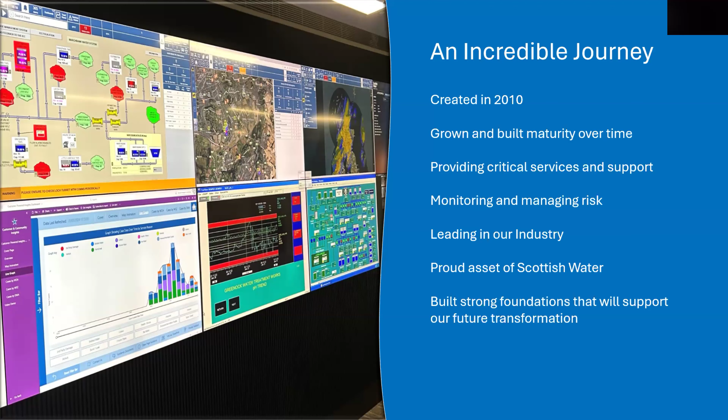As we built our maturity, the main focus for us has always been about reacting and responding. We've not really had the technology that's given us early information to make intelligent decisions. Part of our future transformation is very much to move from a place where we react and respond to becoming much more predictive, preventative, and using lots of information to allow us to make those intelligent decisions based on evidence.

One of the big focuses that we have is about building the maturity of our asset base and making that much more intelligent. At the moment, we have a number of initiatives underway, and a lot of that is focusing on building water and wastewater sensor information so that we can gather data from the asset base and join that up with other existing data that we already have in our ICC to help inform what's happening right across the system, give us insight into asset health and also emerging risks, so that we can ensure that we are delivering the absolute best service for our customers.

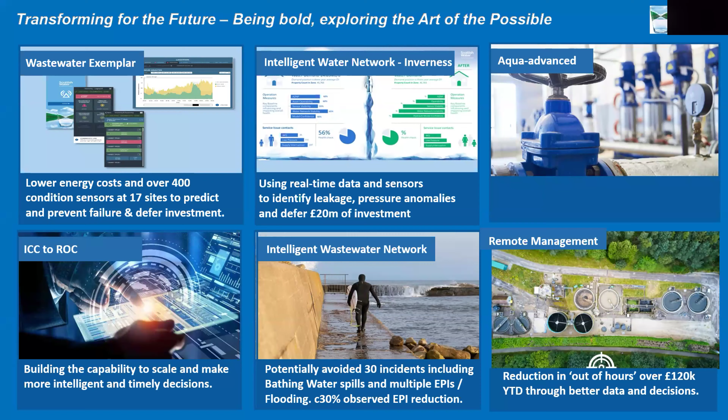And this is a system that we chose to pioneer in the ICC pre-COVID and pre-transformation programme as well. We started our plans very early, and the aspiration that we had was to implement this system into what's known as the Lomond scheme. So the Lomond scheme is basically the largest water treatment supply zone in Scotland. It has a throughput of around 190 megalitres a day, and the clear water tanks at the Balmore Water Treatment Works hold over 5 million gallons each.

So it just gives a bit of a sense of the size of the treatment works. As I said, it's the biggest water supply zone in Scotland. It's based in the west of Scotland, but pushes water out as far as the east of Scotland and the south. And in Scottish Water, we are actually one of the biggest users of energy in Scotland. We've got one of the highest electricity bills out there.

And the focus of the Lomond scheme has always been about managing interventions manually. So looking at levels in tanks, etc., and taking decisions to operate the system. And that has been done in an inconsistent way in the past. So we have 24/7 shifts within the Intelligent Control Centre, and each one of those shifts would maybe have their own way of operating the system and making decisions. So the focus was always about risk, never on energy.

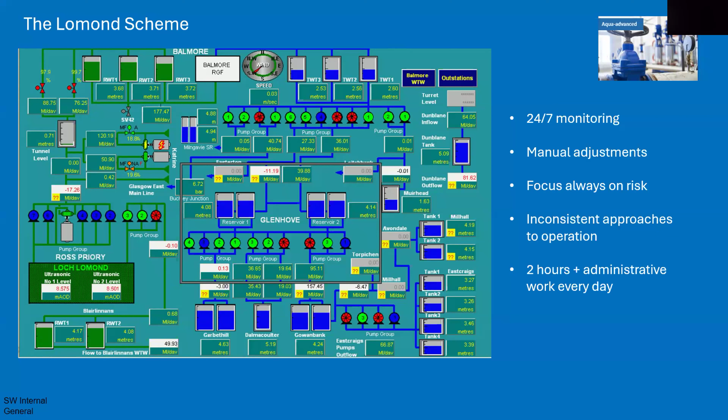And in terms of the work that involved, there was over 2 hours of administration work every single day for the team in ICC. But we're aware that there's inefficiencies there. The world is changing. We have to become much more responsible in how we use power, how we take care of the planet. And we saw an opportunity to implement digital twin technology in the form of Aqua-advanced.

And one of the decisions around this was not just about us bringing in some new technology into the control room. It was very much about asking ourselves, why would we want to do this? So I've already mentioned about let's start to move away from just focusing on risk and start to focus much more on how we can take care of the environment and reduce our energy consumption around how we operate the Lomond scheme. Also gave us an introduction to automation in the control room.

I mentioned earlier that we get lots of telemetry alarms, etc. We want to do as much as we can to bring automation in to try and reduce the amount of manual tasks that we do, and also take away some of the decision making from our team to really help with their well-being and free up capacity to do other things.

And something else that I'm sure everyone on this call is really passionate about is how do we optimise our asset performance? We don't have all the money that we would need to make sure that all of our assets operate as best they can, but we need to get into the space of understanding asset health and taking steps to operate them differently so that we can extend life cycles and perhaps even save customers money and reduce the need for reactive investment in the future.

And I've mentioned a couple of times the word well-being. For me and for the wider Scottish Water, that is absolutely something that we are very passionate about. It's taking care of our people and recognising that technology is not just about the shiny new tools. It's about how can we help people to do their job better and make it easier for them as well. And this system also gave us the opportunity to start exploring new ways of working in the ICC as well.

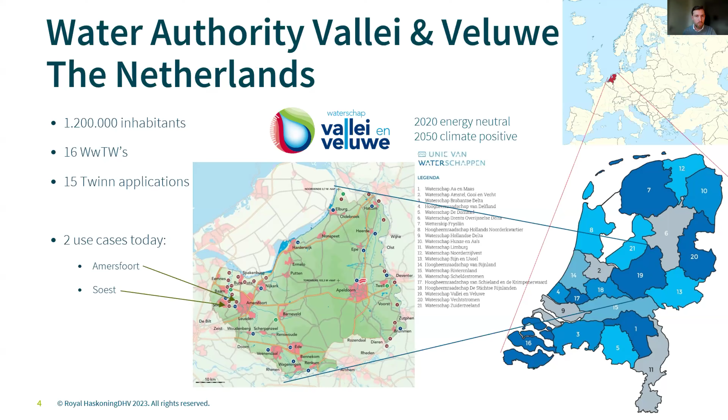And today we will focus on two use cases, for the plant of Amersfoort and also the plant of Soest, where we have done recent research on the performance or the impact of the applications on the targets we have in mind. At Amersfoort, we really focused on effluent quality and energy savings. Vallei en Veluwe experienced at this plant that it can be quite challenging regarding the nitrogen in the effluent. And the idea was that with control we can stabilize and improve the effluent quality and also save energy meanwhile.

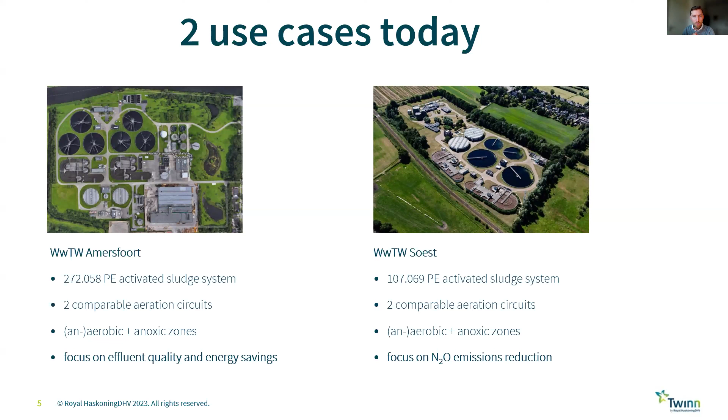And at Soest we executed a research plan where we focused on measuring N2O and checking several hypotheses regarding N2O, one of which consisted of a comparison between the local control and the advanced control of the digital twin. So if we zoom in to Amersfoort, the targets were to have more of an autopilot solution, which should deliver a smoother operation for the process operators, to stay within total N smaller than 10, and to have the energy usage reduced.

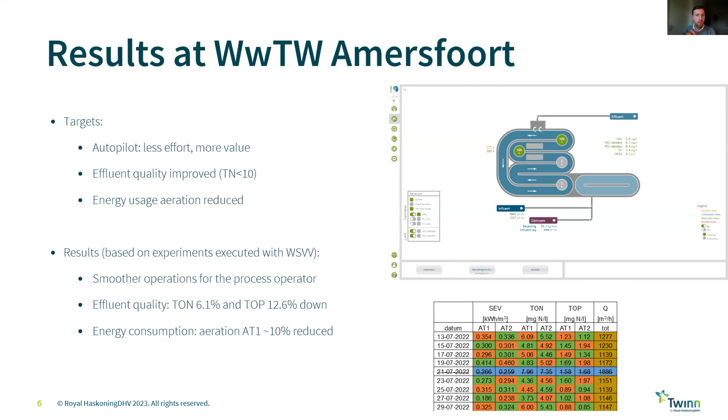For this, we executed an experiment where we changed between the local and advanced controller, and did analysis on the impact of this. For several parameters we researched the impact, and we concluded that we were able to improve effluent quality, and especially that for one of the aeration tanks, we were able to make a major reduction in energy consumption for aeration. Based on these results, we were able to say what the exact impact of the advanced control was. And during the research, we of course also had some other experiences which we still could improve at this plant.

For the Soest case, we did several analyses regarding N2O emissions, and one of them was a comparison between the PLC and APC control. Especially during the higher loaded period, we were able to see a difference between the N2O values with the advanced controller compared to the local controller. We saw there a difference of 1/3. Besides that, we also noticed a very clear relationship between the daily dry weather flow pattern to the plant and the values of N2O. So when there's more load coming in, the N2O occurs, and you can then also make a difference with the controller.

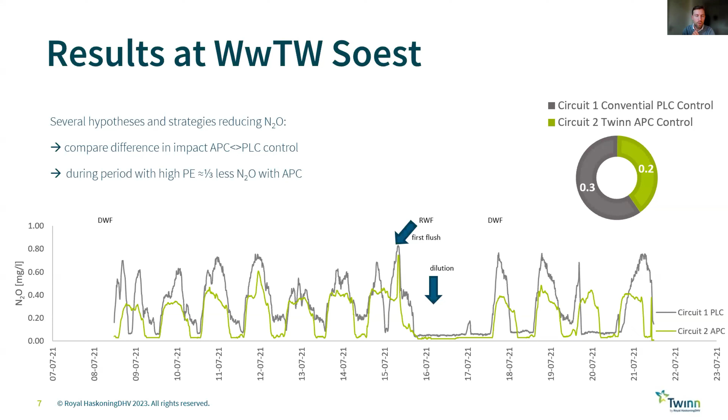The conclusion is that digital twins can really help in achieving goals regarding effluent quality, emissions, and energy. But having clear goals with the digital twins is very important. Besides that, robustness and adaptiveness of the solution is very important for the operators. So having the algorithms able to run independently without intervening every time is a very important aspect. And as we saw at these locations, intervention was not necessary in operation.

Also a very important aspect of implementation of the digital twin is that the functionality is explainable to the operators, and that the set points are traceable for the operators, so that the operator can derive what the controller exactly has prescribed, but is also aware of the mechanism that's being used to come to the set point. So that is the conclusion of these use cases.

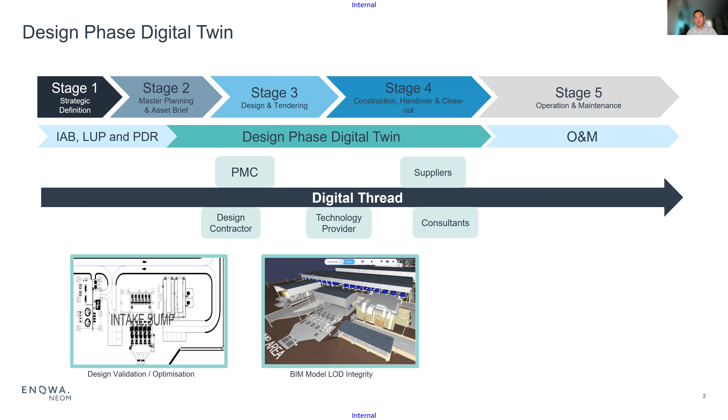Finally, we have also incorporated reality capture, including on-site asset visualization, to be able to see and monitor on a day-to-day and week-by-week basis the development that's happening on the ground. So this provides an immediate reflection of the construction activity.

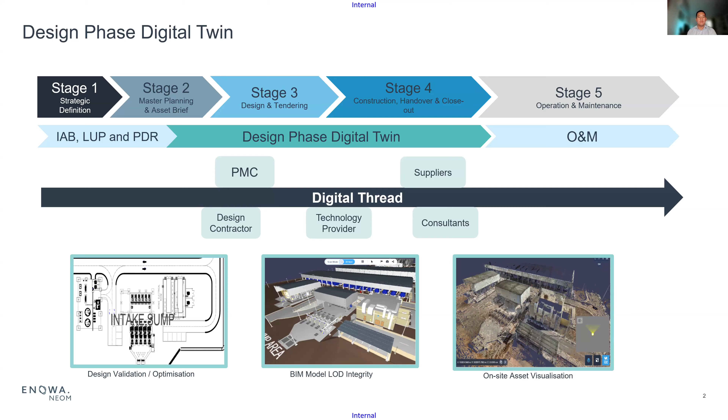I'd like to take this opportunity again to thank our partner, which supported us through this implementation of the design phase digital twin, especially Gigi here, who really helped us pull everything together and implement this digital twin environment. Thanks to the partner, we're able to create a comprehensive set of fully integrated systems that work together as one single platform to make that functionality a reality.

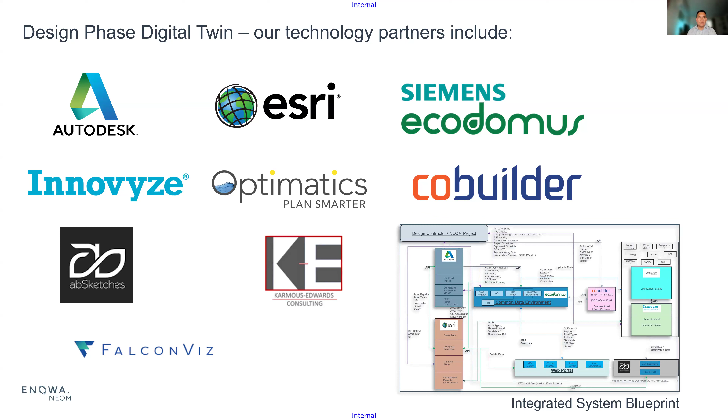One of the interesting things we saw immediately after implementation is that technology and software applications tend to be very mature nowadays, so there don't seem to be a lot of challenges to implementing technology. However, the data collected as part of the project delivery lifecycle and the data we get from our suppliers and vendors seem to be a critical element when it comes to the quality of the information reflected in the digital twin.

So immediately after implementation of the digital twin, we started looking at some of the more fundamental requirements and specification so that we can continually improve and again work with our PMC and contractors to ensure that we get a consistent feed of data and information. And this is where we created the water asset data framework.

Now, this includes a set of procedures and specification, such as the asset naming and tagging procedures, the 3D model BIM procedures, as well as a set of project information requirements. And it goes across into the people elements as well.

As you can see from the top, on the purple box, we also created the project information management team that continually works with the contractors and with the internal business units to define that information management strategy, communication plan, and have this continuous educational process with our contractors to ensure that the model, the drawing, and the GIS references are compliant to the NEOM requirements.

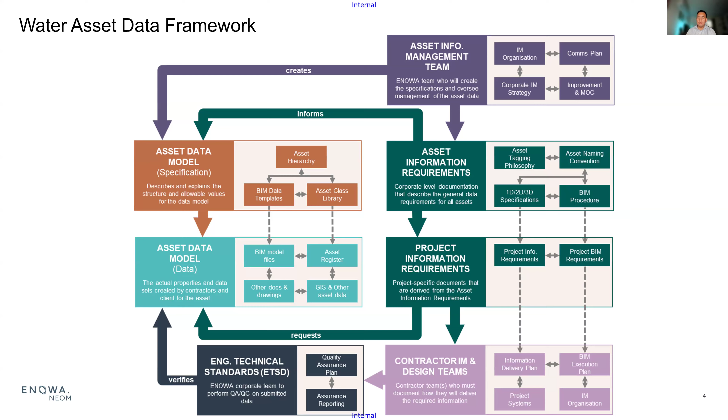Now, further to this, we have adopted a particular standard, which is called CFIHOS standard. Now, again, like I said, we are in a very much greenfield environment. The CFIHOS standard works and makes sense to us because it's a specification that is used for delivering capital projects. So CFIHOS stands for Capital Facilities Information Handover Specification.

By adopting these standards, it gives us almost a shortcut, a very quick way of establishing our asset data model and provides a whole set of reference data library, really down to the detail of the equipment level, for us as a client to be able to ask to a granular detail what information attributes and classification of equipment are needed, as well as be able to further strengthen our digital twin environment by providing a set of software implementation requirements.

And this allowed us to quickly transition from a greenfield asset delivery environment, and to be ready for operation startup, maintenance activity, or in some cases, decommissioning some of the older assets around the NEOM region.

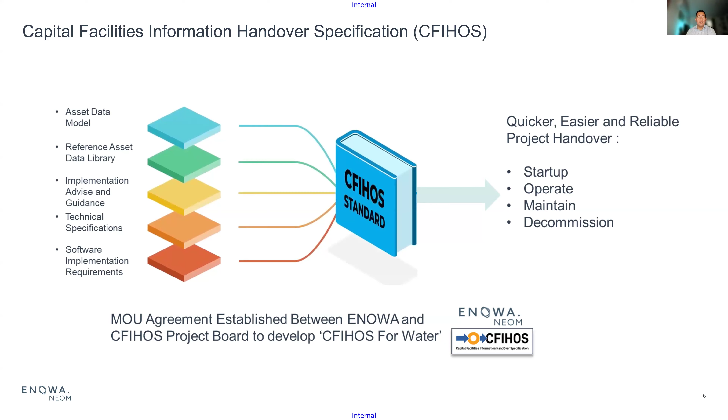Now, moving on to the areas including the greenhouse gas emission. So here at NEOM, we are looking at the GHG protocol and identified three groups of emissions. The emissions are also known as scopes, which are defined at the GHG protocol website.

So scope 1 is the emissions that are direct effects produced by the organization. For example, this includes venting, leakage, waste treatment, and fuel combustion. And scope 2 is the emissions that occur through consumption of electricity, steam, heat, or cooling. These are typically generated not at the water assets, but because we consume this, it is also included in our GHG accounting.

Now, the last one is the more interesting one and somewhat related to what I mentioned in terms of the asset data framework. This is the indirect emission that occurs during a company's value chain. So in this case, we're delivering a greenfield environment. So we do purchase a lot of equipment, there's a lot of construction going on, and the consumption of material to build those water assets.

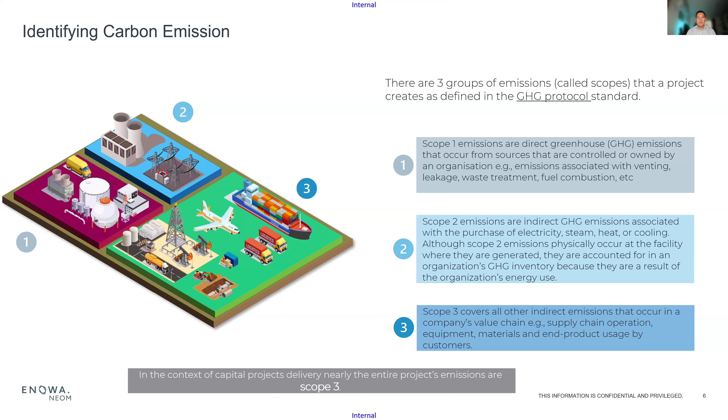So that is in the context of capital project delivery, and what we have been focusing on is exactly scope 3, being able to use the digital twin as a method to capture the scope 3 emissions that occur during the company's value chain in equipment and material usage.

So again, coming back to that stage gate process of delivery. What we have assessed is that we needed to put a specific requirement in early, especially at the initial stage of doing the master planning of our assets. And this is an opportunity where we're able to insert our specific requirements on the life cycle carbon

specification and cascade them down into our PMCs and the contractors, and we found that having implemented that at the initial stage really has a big impact on the ability to accurately capture the carbon value. Based on our experience, it is difficult to capture the exact value of carbon emission. However, by taking this kind of step-by-step approach and inserting the requirements early, we found that this really provides an accurate platform for us to analyze this.

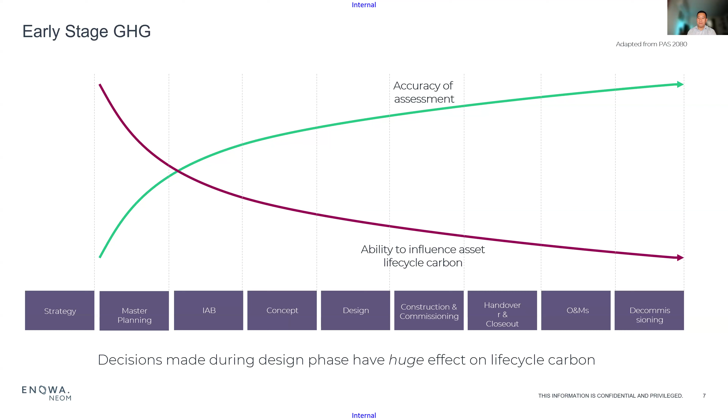Now, so what does this entail? So we established the NEOM standards, and based on the standards, we provide a number of estimations. Now, in order to accurately measure the carbon emission, we had to expose the requirements to the supply chain, and we do that at the early stage, so that the data produced by the supplier, this is where we relate to the CFIHOS standards.

So in the CFIHOS standards, we have inserted a number of required attributes and data sets, and we put those out there as part of the project information requirements. Now, this becomes a mandatory submission by each of the data suppliers. So this includes EPC contractors as well as vendors. So in addition to providing the equipment, they also produce data sheets, and inside data sheets would contain those specific values where we needed to measure the carbon emissions.

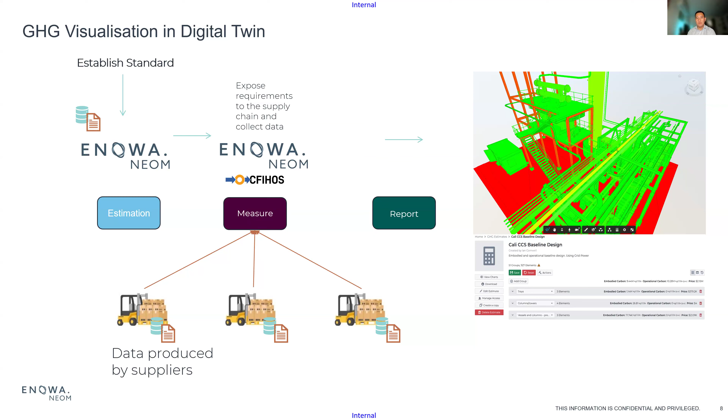And then in this digital twin environment, we're able to then reflect that into a report. And as you can see from this particular screenshot, we're able to hotspot some of the major areas that contain high value of carbon data. Okay, so that was a very quick overview of our digital twin environment and some of the activities that we are currently implementing to capture that greenhouse gas emission and carbon value data.